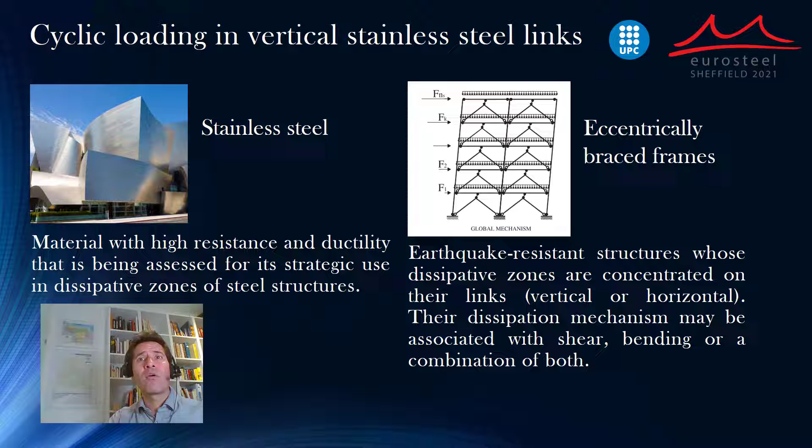Cyclic loading in vertical stainless steel links have been studied from two perspectives: the perspective of the material, stainless steel, a material with high resistance and ductility that is being assessed for its strategic use in dissipative zones of steel structures, and the perspective of the structure, eccentrically braced frames, earthquake-resistant structures whose dissipative zones are concentrated on their links, either vertical or horizontal, and their dissipation mechanism may be associated with shear, bending, or a combination of both.

In this research project, eccentrically braced frames have been studied from the materials perspective, cyclic hardening, from the perspective of isolated horizontal links, isolated vertical links, and vertical and horizontal links that belong to systems.

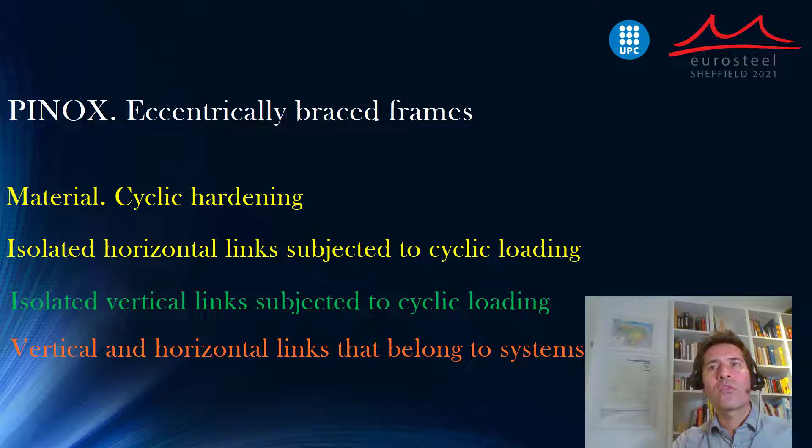From the materials perspective, a vast experimental program on 40 specimens tested under different amplitudes of deformation strain up to 5%, under different protocols like companion, multiple step, or arbitrary, belongs to a vaster program of a PhD thesis currently being elaborated by Lucy Lázaro.

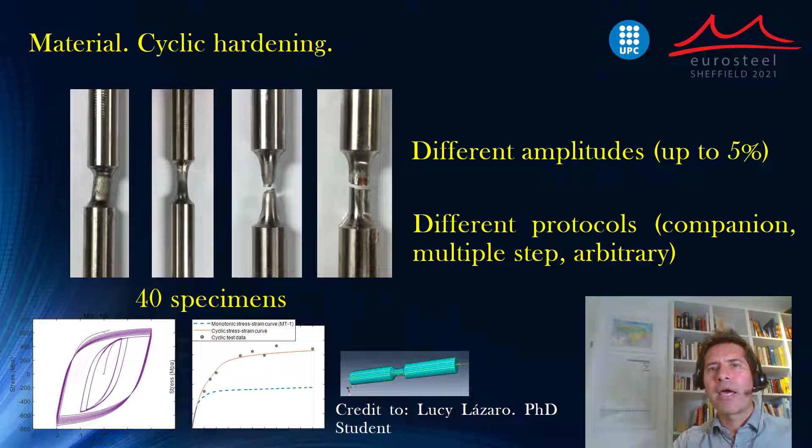Here we can see the experimental test together with numerical simulation of such test under arbitrary cyclic loading.

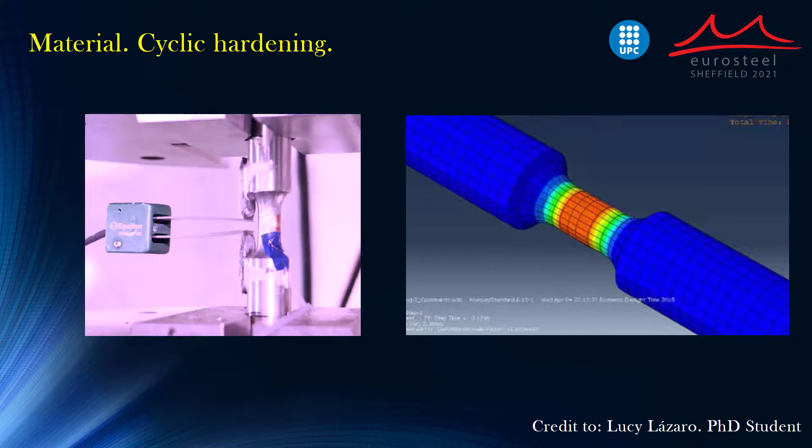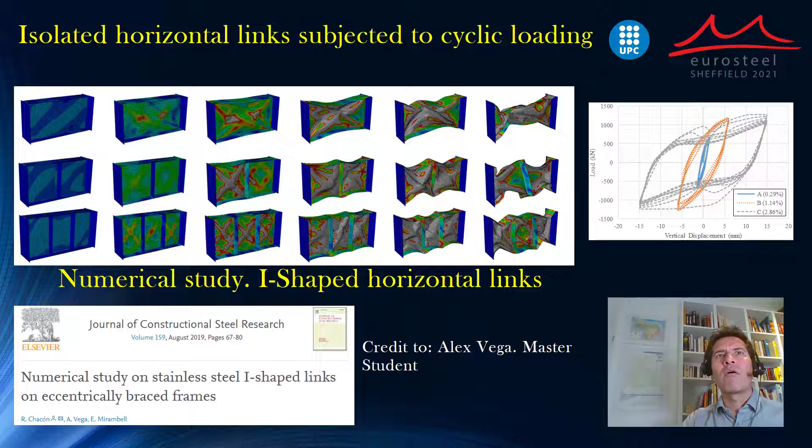On the other hand, the analysis and study of isolated horizontal links subjected to cyclic loading has also been addressed in previous research within the project, which has already been published, and these I-shaped horizontal links have been studied under different configurations of stiffening, of material, of slenderness, and of level of loading.

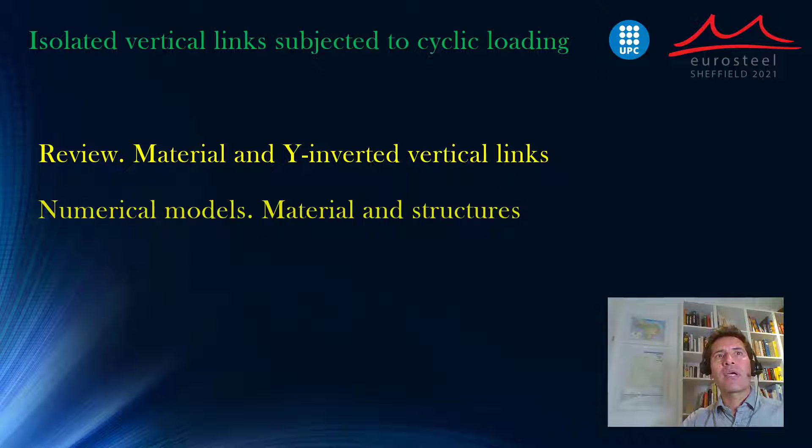When it comes to this topic, isolated vertical links subjected to cyclic loading, several topics are worth pointing out. First, a review of the material and of Y-inverted vertical links. Second, some numerical models for the material and for the structures. Third, we present a parametric study on isolated vertical links, and then some results and discussion of such results.

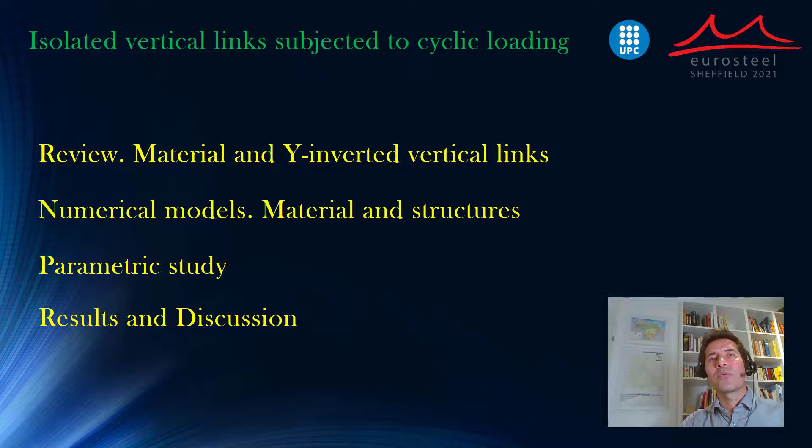So the material, as we mentioned, is stainless steel. It's an alloy which contains a high content of chromium. An important characteristic for this study is the rounded sigma-epsilon curve.

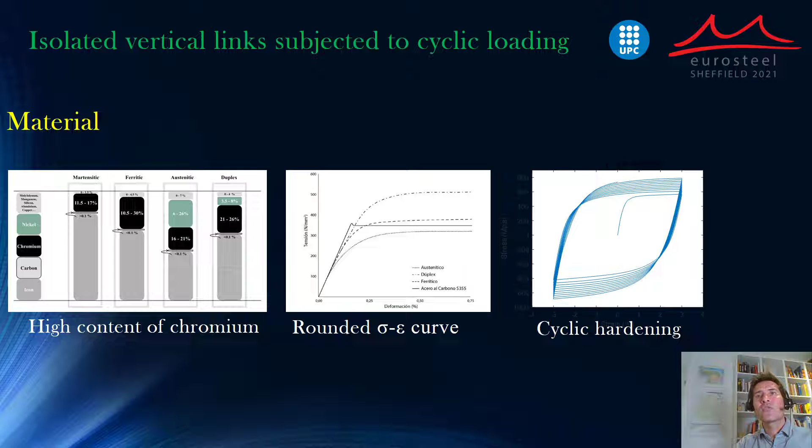Also, one of the characteristics that is relevant here is cyclic hardening. Stainless steel hardens when it's subjected to cyclic loading up to certain points, and it needs to be properly addressed when modeling.

If we move now to the geometrical classification of the links, geometrical and structural, the links, either horizontal or vertical, are classified according to a parameter called ρ, which is the relationship between the length of the link and the ratio between the plastic moment and the plastic shear resistance. This ratio ρ determines that the link may be classified as short, as long, or as intermediate.

If they are classified as short, the primary failure mechanism is associated with shear. If classified as long, their primary failure mechanism is bending. And if they are intermediate, there is an interaction of both shear and bending. This classification is defined in Eurocode 8.

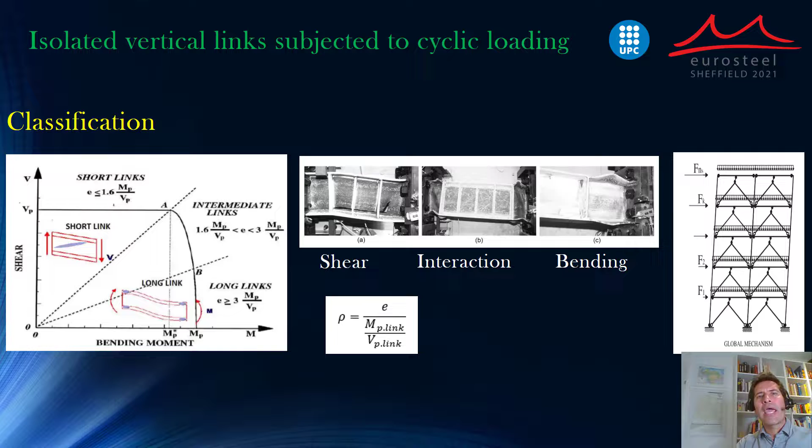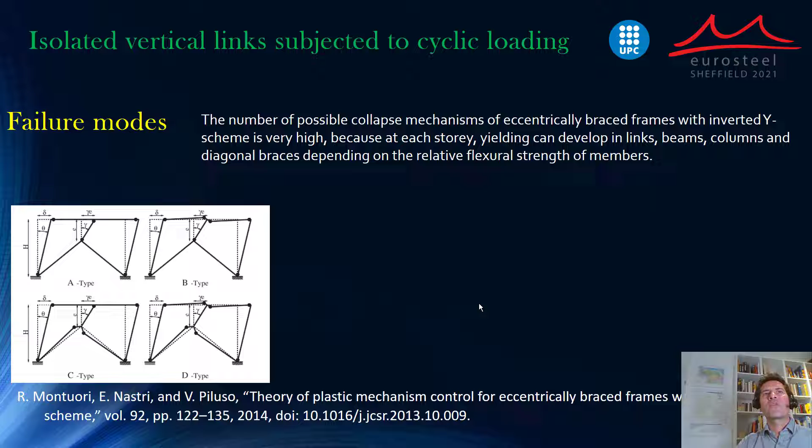Some failure modes have been presented in the literature. The number of possible collapse mechanisms of eccentrically braced frames is very high. At each story, yielding can develop in links, in beams, in columns, and in diagonal braces. So design looks for the failure mode that is concentrated on the link, which has already been studied by researchers.

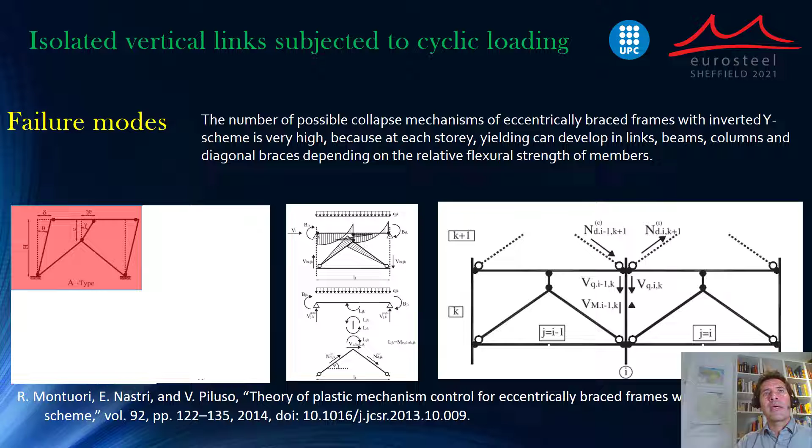Also worth mentioning is that the numerical models implemented for stainless steel subjected to cyclic loading require proper understanding of the type of hardening included in the model. We can define hardening as isotropic, in which the yielding surface expands together with the uniaxial load that is given.

It may behave as kinematic hardening, in which the yielding surface does not increase in size, but moves according to the cyclic loading. But in this case, austenitic stainless steel exhibits both components.

It exhibits isotropic hardening, but it also exhibits a certain degradation with the cycles, which needs to be reflected in the numerical modeling. This has been properly described using the Chaboche model, in which there is a component which is isotropic and a component which is kinematic.

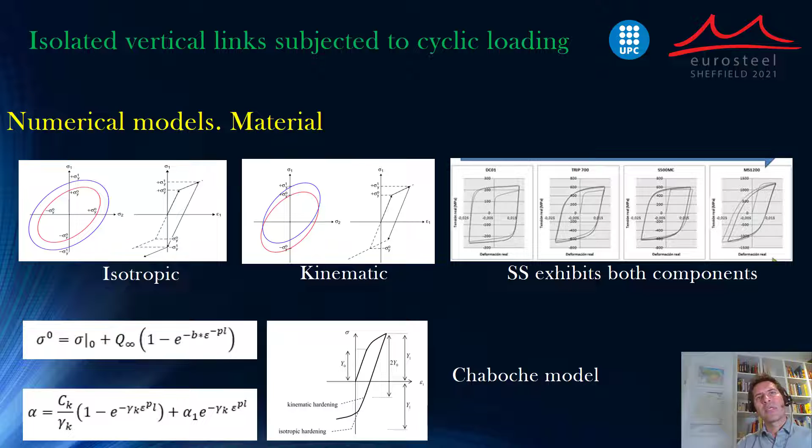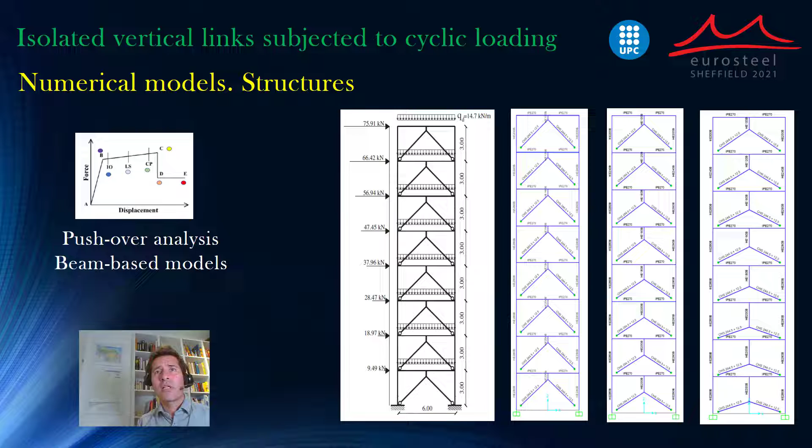Numerical models from the perspective of structure: we have developed and studied beam-based models in which all elements are defined like a big structure. In this structure, a pushover analysis is performed, including vertical loading and horizontal loading according to a certain pattern.

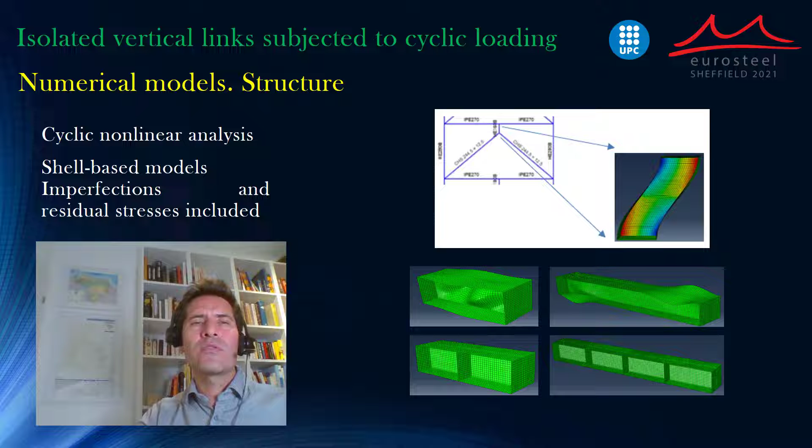We also focus on more detailed structures in which we analyze isolated vertical links. These links are subjected to cyclic nonlinear analysis, and the models are more shell-based. Imperfections and residual stresses are included in such detailed models.

So we have a parametric study that includes system levels, in which certain different characteristics are studied at a system level, and also a parametric study developed at member levels, with a detailed vertical link.

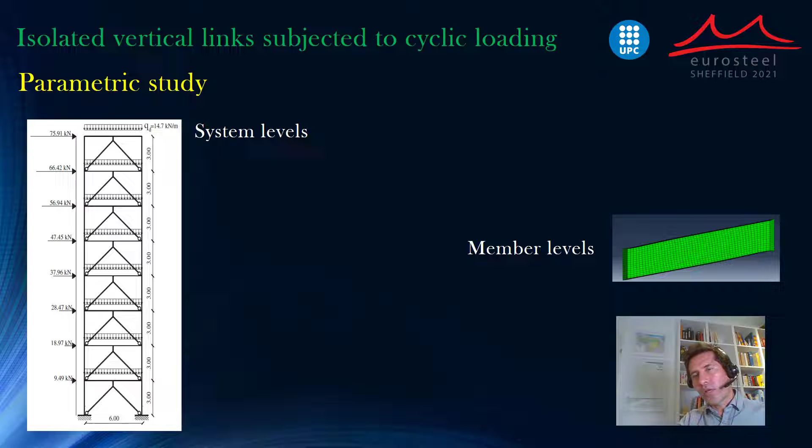For understanding this parametric study, we first develop a global system pushover analysis, obtain the response curve, and for different configurations detect three levels of loading. In the global analysis we detect the maximum load, which generates a certain displacement delta max. We divide this displacement by 2, obtaining 0.5 delta max, and multiply it by 1.5, obtaining a higher displacement on this response curve.

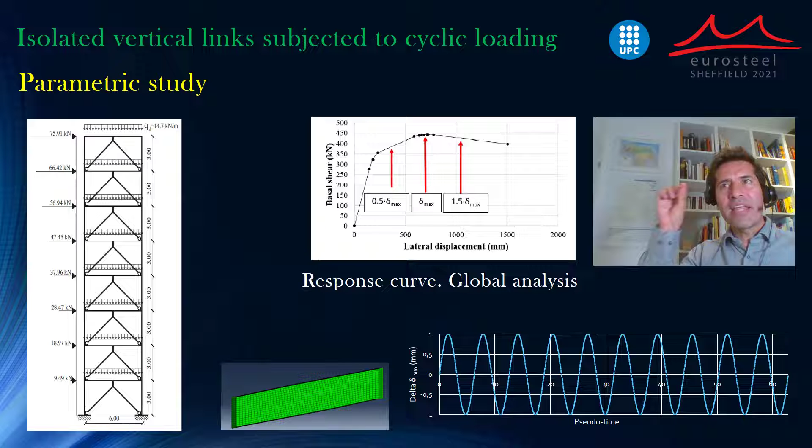So let's keep in mind these three values of displacement of the system according to the global analysis. With these values, we provide cycles of loading to the link in a detailed model, and this link will be subjected to a delta related to 0.5 delta or 1.5 delta.

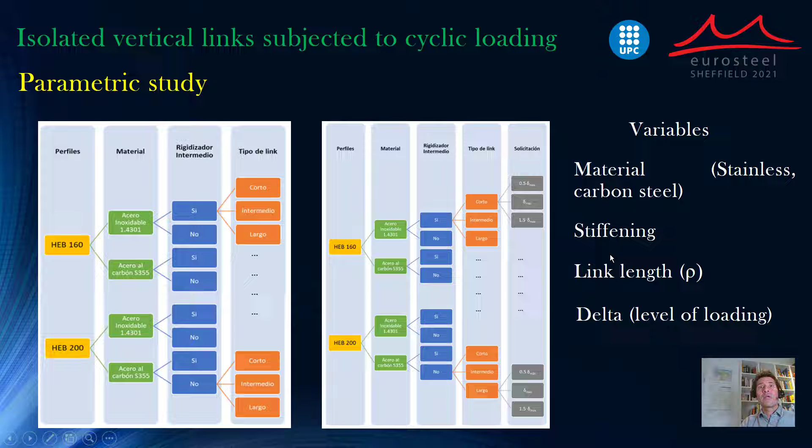So we developed a parametric study in which variables such as material, stiffening, link length, and delta, which is the level of loading, were varied profusely, and we can see some results.

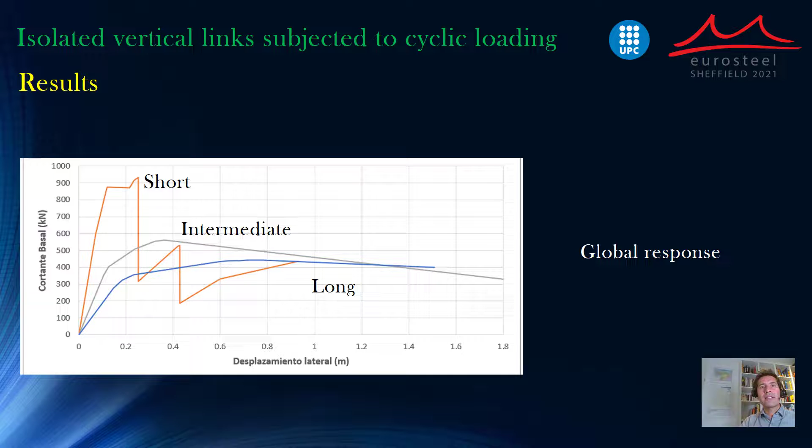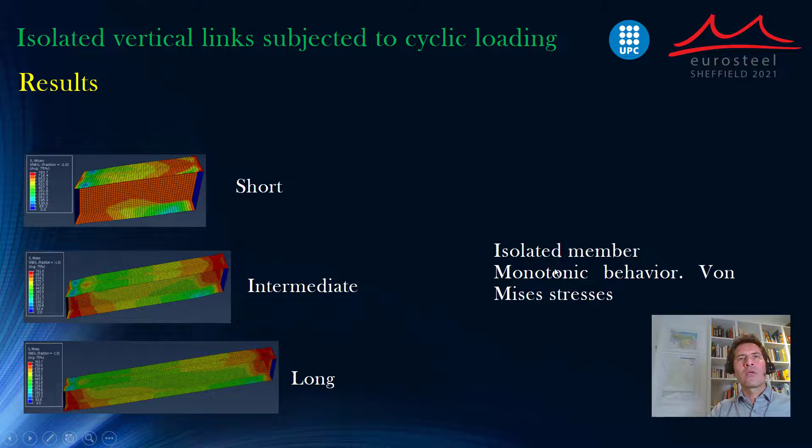For the former, we can see that the response is quite linear in all cases, especially for long elements. There is a certain drift in the linearity for the case of short elements, which were stiffer and in which displacements are more reduced, of course.

And for the case of 1 times delta, we can see that in general, stainless steel, which is the blue curve, outperforms the orange curve, which is a comparable carbon steel.

And then for the case of 1.5 delta, there is a clear difference between the cyclic behavior when it comes to very high levels of loading compared to the cyclic behavior when it comes to the maximum capacity obtained in the global response.

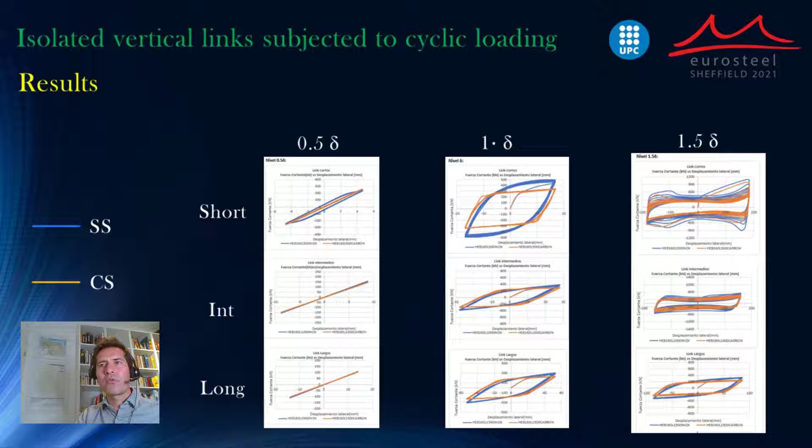So to conclude, a study of the structural response of austenitic stainless steel vertical links was carried out. The study is based on an initial understanding of the cyclic hardening of stainless steel, the global analysis of EBF, and the development of a fully detailed finite element analysis.

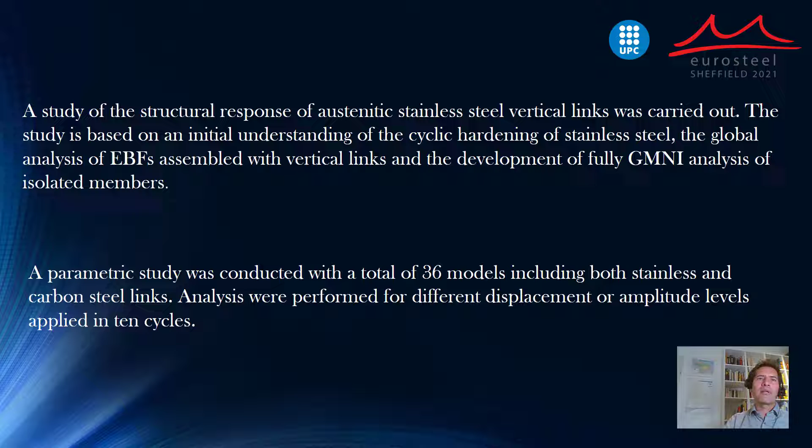This parametric study was conducted with a total of 36 models, including both stainless steel and carbon steel links, for different levels of displacement and amplitude. Austenitic stainless steel can develop higher strength and ductility, making it a good idea to use as a replaceable link in eccentrically braced frames.

However, further studies involving experimental behavior of the material are being developed. Structural questions are being treated by the research group, such as: what is the benefit of using stainless steel in dissipative zones in earthquake-resistant eccentrically braced frames? Does the overstrength provided by stainless steel affect the non-dissipative zones? The design of hybrid stainless steel-carbon steel dissipative and non-dissipative zones ought to address these questions accordingly.